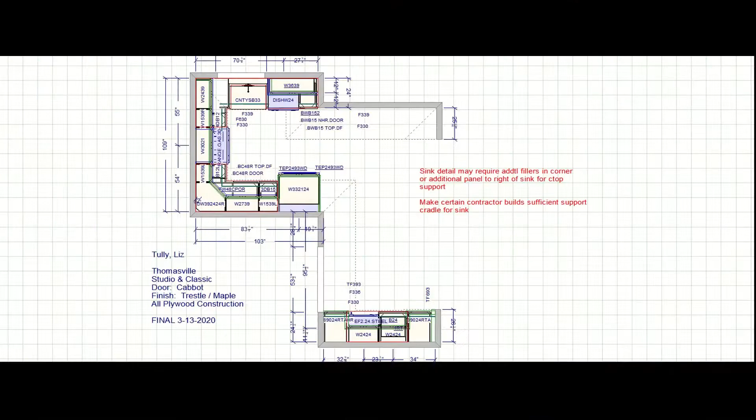Today we're going to look at Aubrey's new kitchen layout. He sent over a photometric request to figure out if he has enough light in his kitchen and to see if he has chosen the right fixtures. We get these requests a lot at WAC, including takeoffs, photometrics, crosses from other products, general layouts.

Or just general help understanding and applying our systems. The first step is going to be to recreate his space. He's given us a PDF with his dimensions, and CAD files are much easier to start with if available, but because it's a do-it-yourself remodel, Aubrey didn't have one, and that's no problem. I can start from scratch anyway.

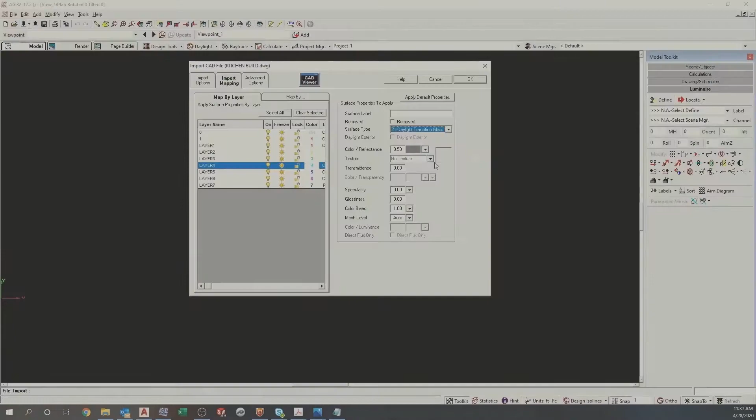As you can see, I'm putting in some cabinets and a refrigerator and texturing as such before I put the lights in to do his photometric study.

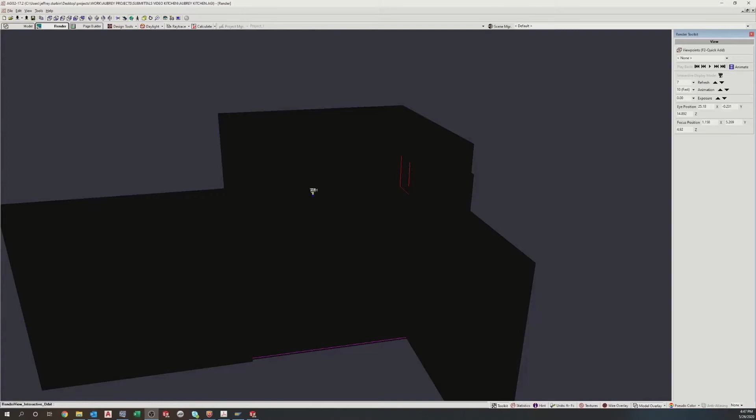So here's our room with none of the lights on, nice and dark of course. Aubrey chose the Oculux series for both his downlighting and his over-sink application, so let's see what it looks like when you turn those on.

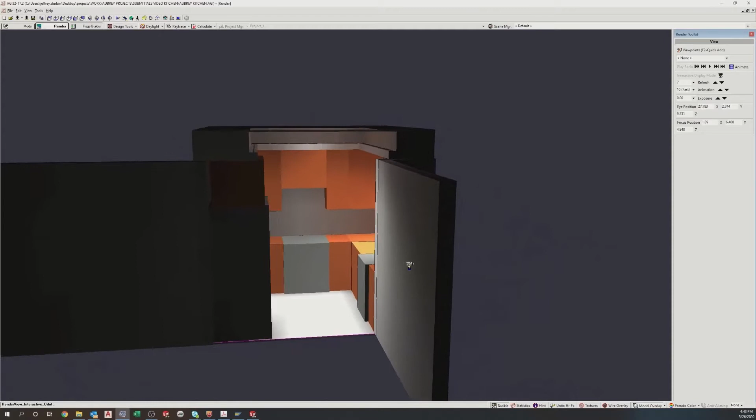Now, there's his Oculux 3.5 inch over the floor. He has two Oculux 1 inch over the sink, and as you can tell from the lighting already, bit of a hot zone over the sink. He's going to want to put a dimmer on those. But overall, general lighting is going to be very good.

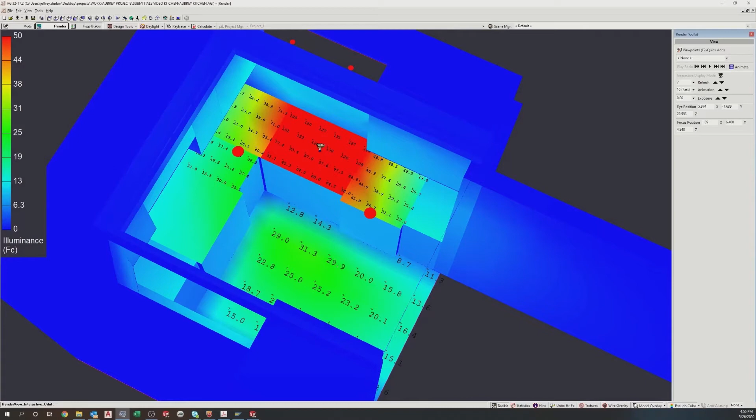There's nice foot candles on the floor, a decent value, somewhere between 25 and 31. As you can see when we turn on our numerical values here, 25 on the floor. Definitely a hot spot in the sink there, about 110, which will want to be either tuned down with a dimmer or only having a single fixture there.

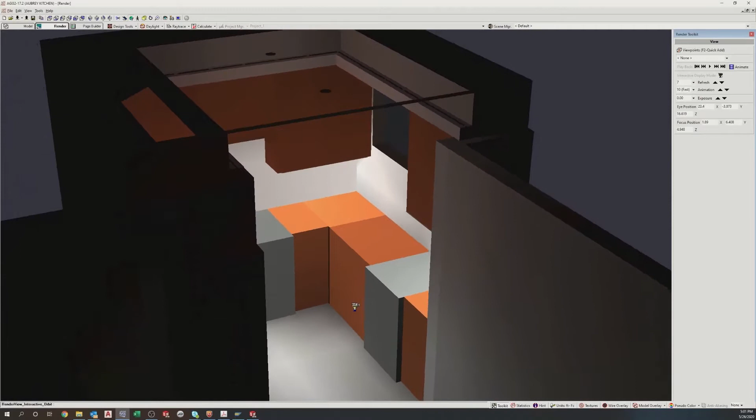But he seems to be missing light on the countertop. So if we turn on our countertop lights, our under cabinet, I put Pro tape, I believe it's Pro 1. As you can see, a couple feet there, a couple feet on the right, a couple feet on the left. The heat map of that looks pretty good too.

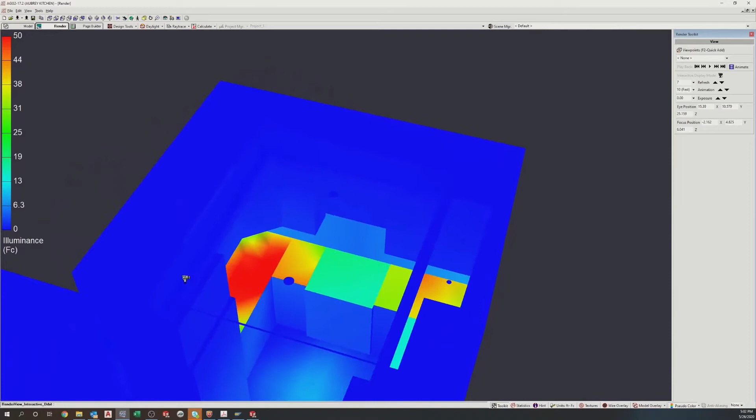There's definitely, I had to cheat a little bit and put some extra tape over there, so that number is going to be slightly lower, and I would explain that to him in the final process. But overall, definitely decent counter lighting. You want in a task area 30 to 50 so that you can have adequate lighting for cutting your vegetables and washing your hands and all sorts of things. And all the way around, tape is a good choice.

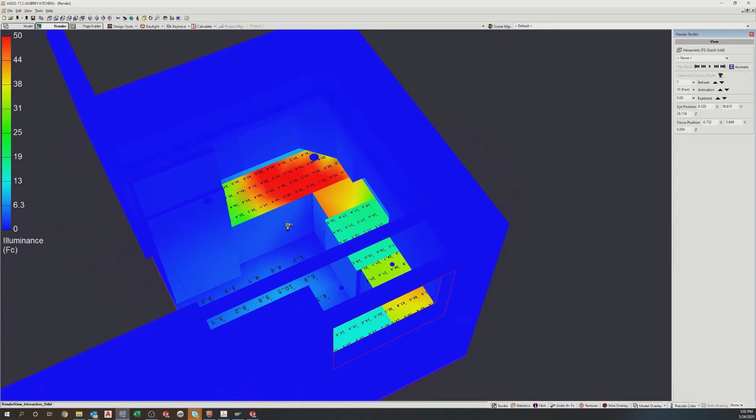The last thing on Aubrey's list was his optional cove lighting. He wasn't sure if he was going to put a cove in or not, and in doing so, I decided to put one in for him. Cove lighting, of course, is a nice accent, very bright in the ceiling. Does still provide enough light to at least walk through the kitchen.

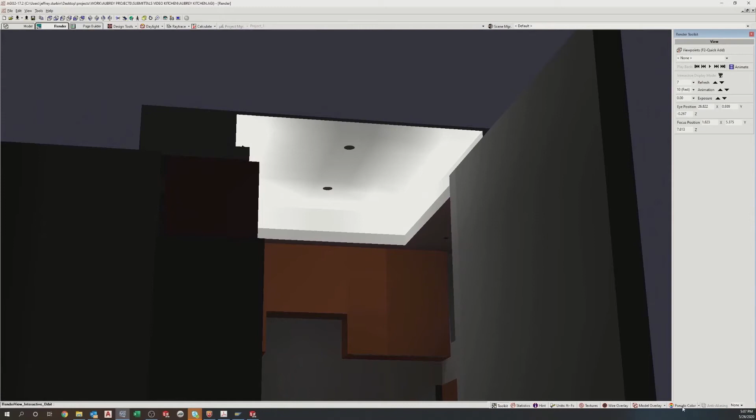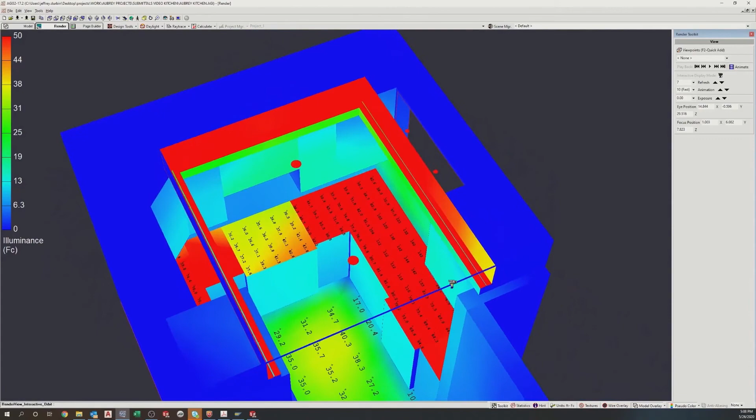And here it is with all the lights on. As you can see, we're getting plenty on the floor, somewhere between 30 and 40. Our countertops are very well lit, and he's definitely going to want a dimmer, and I will, of course, tell him that once I put the final package together.

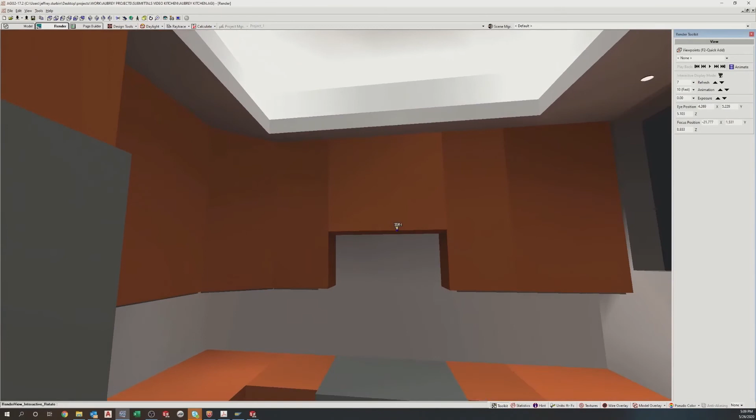And overall, the process looks pretty good. He has decent shadowing. Kind of see here on the pan across that nice kitchen layout. Turn the heat map on. Again, hot on the countertop. We can turn that down if he wishes.

And you put the numbers in. And of course I can put all this together in a submittals package for you and label accordingly.